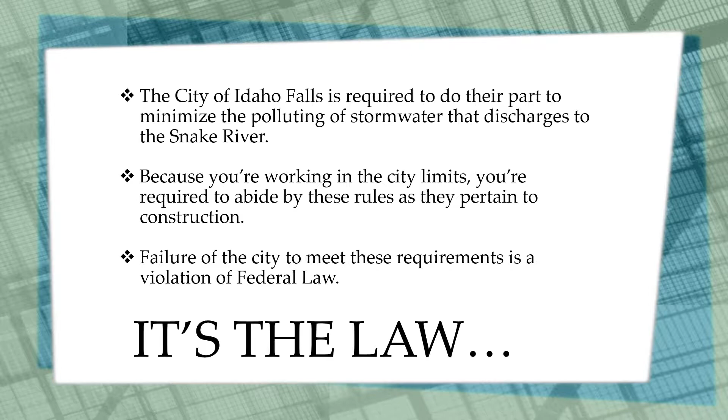Our goals and objectives for today are for you to understand what we can do to minimize the impacts of construction on water quality, understand the requirements of the City of Idaho Falls, the State of Idaho, and the EPA, and to learn about BMPs, or Best Management Practices for Construction, your tools for doing your part.

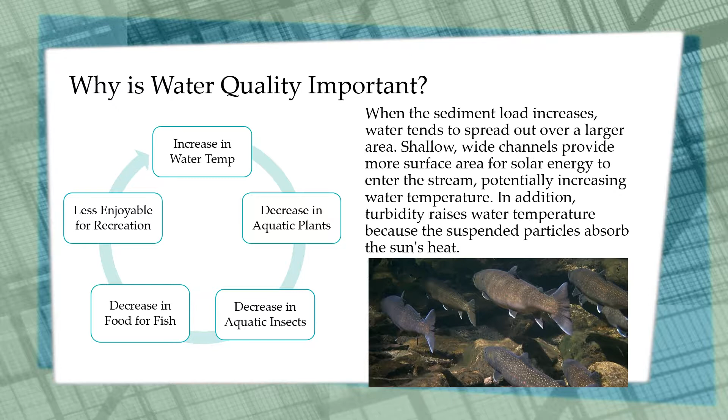So why is water quality important? When sediment load increases in a river, the water temperature increases. As that water temperature increases, aquatic plants die, aquatic insects decrease, leaving less food for fish. High temperatures also mean that certain species of fish can no longer thrive or survive. It also makes recreation less enjoyable. There are countless uses for clean water. It's important that we do our part to try and keep our lakes and rivers clean.

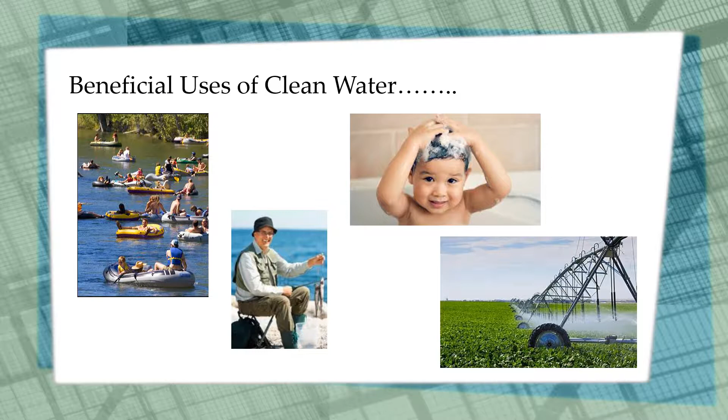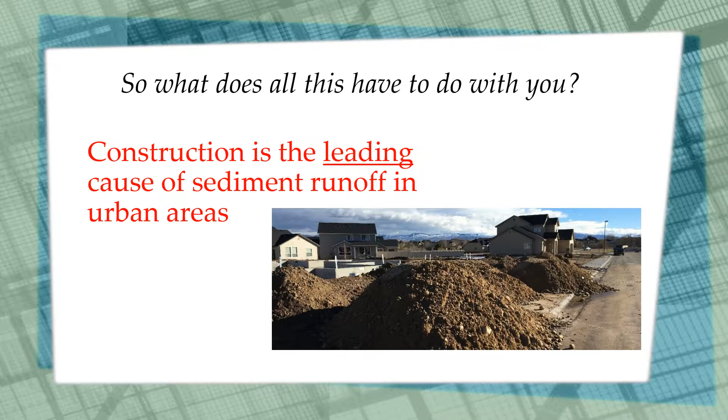So what does this have to do with you? Construction is the leading cause of sediment runoff in urban areas. Under the EPA's Clean Water Act is the National Pollution Discharge Elimination System. The NPDES is over stormwater management for 3 different sectors: construction, industrial, and municipal. The municipal separate storm sewer system is a sector that applies to the City of Idaho Falls because the city discharges stormwater to the Snake River.

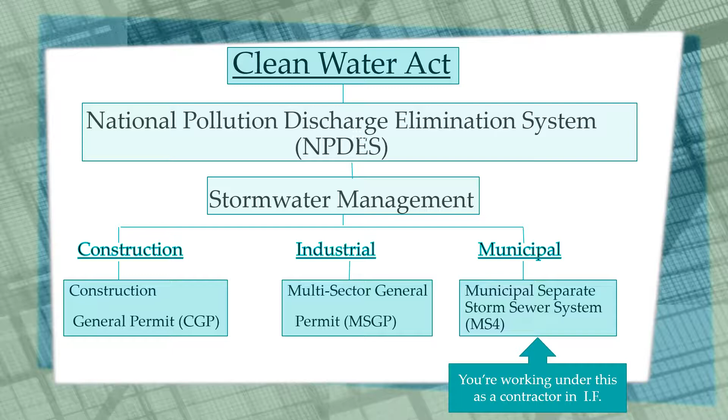When you're working within the City of Idaho Falls, you're required to comply with the city's Erosion and Sediment Control Ordinance. The purpose of this ordinance is to protect stormwater, groundwater, water bodies, water courses, and wetlands from construction activities pursuant to and consistent with the United States Clean Water Act. Their goal is to manage and control the amount of pollutants in stormwater discharges, soil erosion, sediment discharges, mud and dirt deposits on public roads caused by or the result of construction activities.

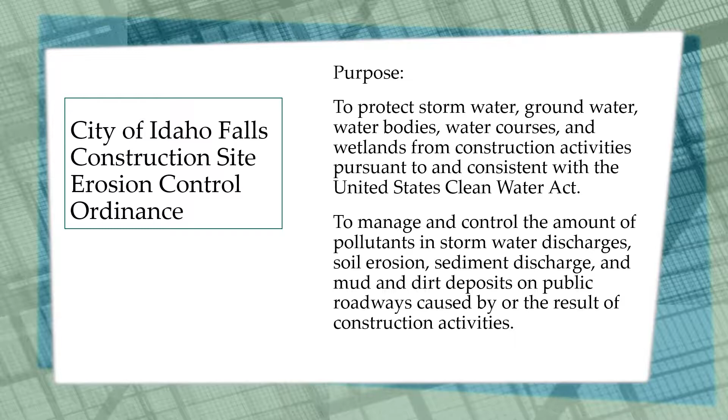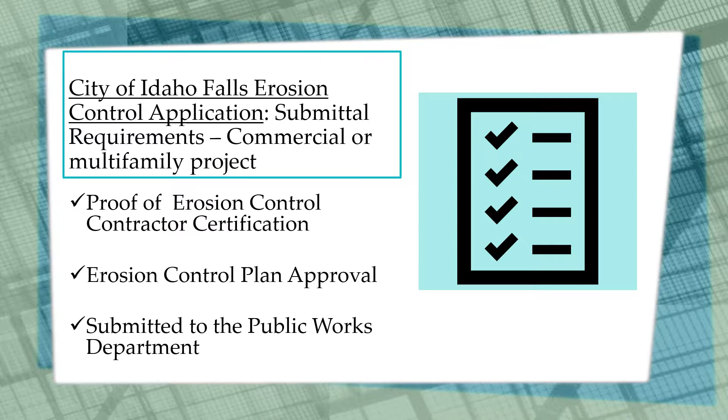The City of Idaho Falls erosion control application must be submitted to the Department of Public Works for commercial or multifamily projects. This application must include proof of an erosion sediment control contractor certification, and you must obtain approval of your erosion control plan. For single-family residential projects, your erosion control application must be submitted to the building department. Your project's erosion and sediment control BMPs will be inspected during the foundation inspection.

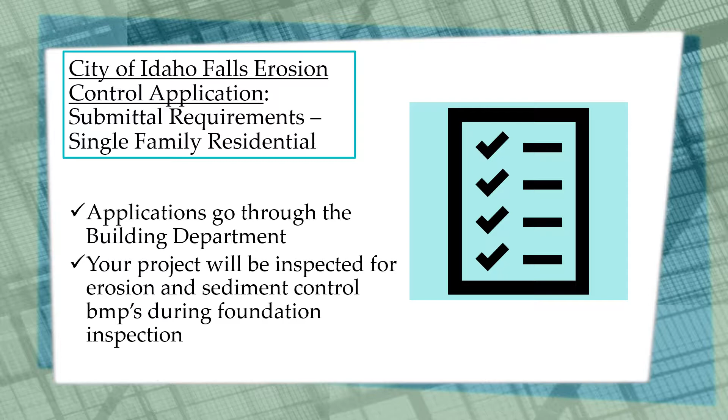The City of Idaho Falls requirements are that no clearing shall commence until all erosion and sediment control BMPs have been installed. Notify the building department or the Public Works Department at least 2 working days before the start of construction, at the installation of your BMPs, completion of final grading, and close of construction or final landscaping.

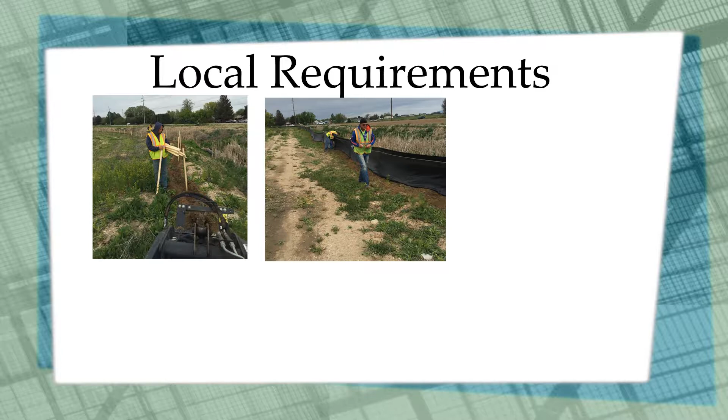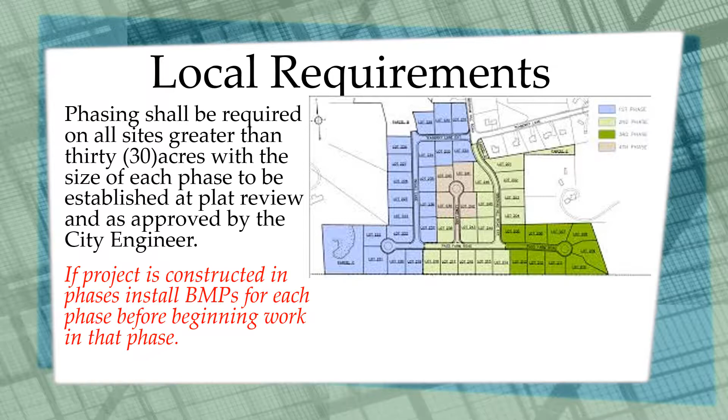The city requires that all sites greater than 30 acres be constructed in phases. Those phases are established at the plat review period and are approved by the city engineer. If a project is constructed in phases, you must install your BMPs for each phase prior to beginning work on that phase.

All erosion and sediment control BMPs shall meet the design criteria as set forth in the BMP manual for Idaho cities and counties that was published by the Idaho Department of Environmental Quality. You can go to your nearest Idaho Department of Environmental Quality office to obtain a hard copy of this manual, or you can go to their website to download a digital copy. In addition to using this manual, always refer to the manufacturer's installation instructions for the specific products that you purchase to use.

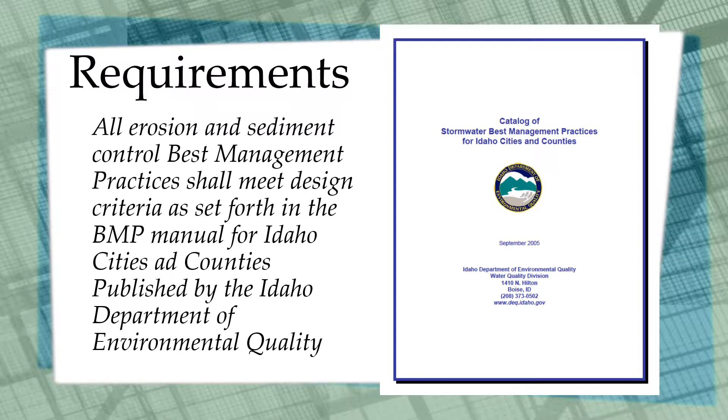The Idaho Department of Environmental Quality has jurisdiction over air quality for the entire state of Idaho. Fugitive dust from construction is considered air pollution and is therefore regulated by the Department of Environmental Quality. There are consequences for non-compliance. Failure to reasonably control fugitive dust on your job site may result in enforcement action by the Idaho Department of Environmental Quality. Enforcement action can include monetary penalties.

The Idaho Department of Environmental Quality has oversight over air quality for the entire state of Idaho. Fugitive dust from construction is considered air pollution and is regulated by the Department of Environmental Quality. Failure to reasonably control fugitive dust may result in enforcement action by the Department of Environmental Quality. This enforcement can include monetary fines.

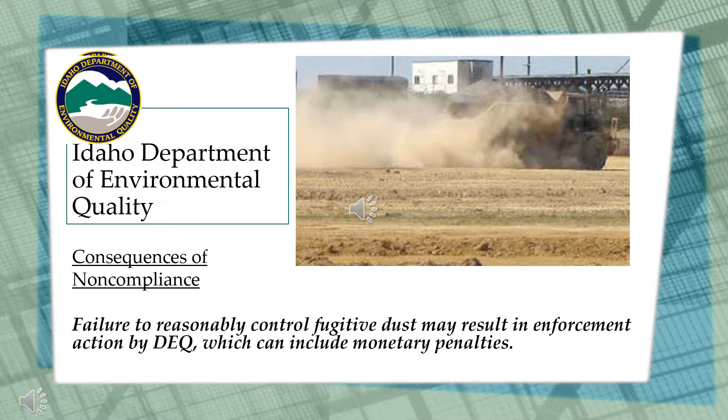As we mentioned before, the EPA's Clean Water Act includes coverage over stormwater from construction activities through the Construction General Permit. The EPA's coverage through the Construction General Permit is for any construction project that disturbs 1 acre or more. It also applies to smaller projects that are part of a larger common plan of development. An example of a larger common plan of development would be a subdivision.

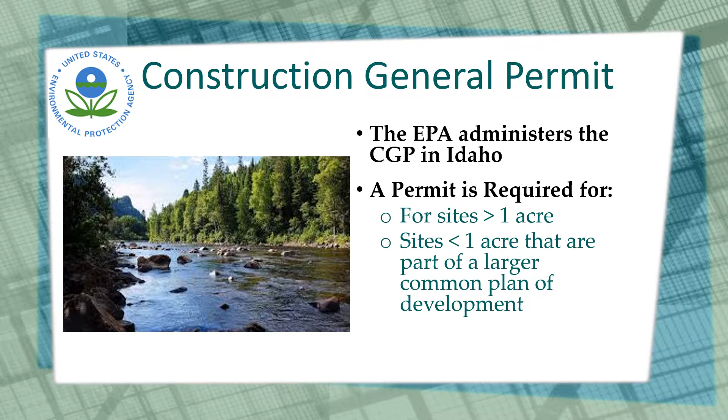If your project falls under the requirements of the Construction General Permit, a Stormwater Pollution Prevention Plan, or SWPPP, is required. A SWPPP should be provided to you if it's needed. If it's not and you know it's needed, don't start work until one is prepared by a qualified plan designer. The SWPPP must be submitted to the EPA via a Notice of Intent 14 days prior to construction. The SWPPP document must be kept on site at all times. This is applicable inside and outside the city limits.

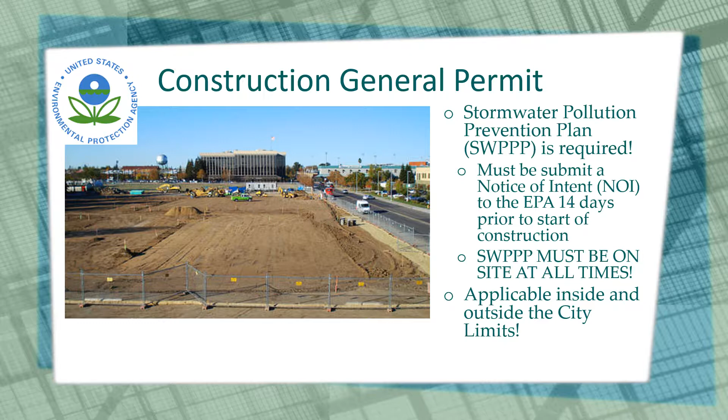Your stormwater pollution prevention plan will include a very detailed written document. It will also have site maps, drawings, and inspection forms. Self-inspection is required once every 7 days or every 14 days and after a 1/4 inch rain event. You must keep your completed self-inspection forms on site at all times in the event that the EPA decides to visit your site. These forms are legal documents and are very, very important and must be kept on site for the duration of your project.

During your self-inspections, you'll be evaluating your BMPs to see if they need maintenance, replacement, and whether or not they need to be changed out. Maintenance consists of cleaning and minor repairs to BMPs. Replacement is necessary if a BMP has been damaged beyond repair or if it wasn't ever installed properly. If you see that a BMP is insufficient to perform as anticipated, additional BMPs may need to be added or the BMP be replaced entirely with a different one.

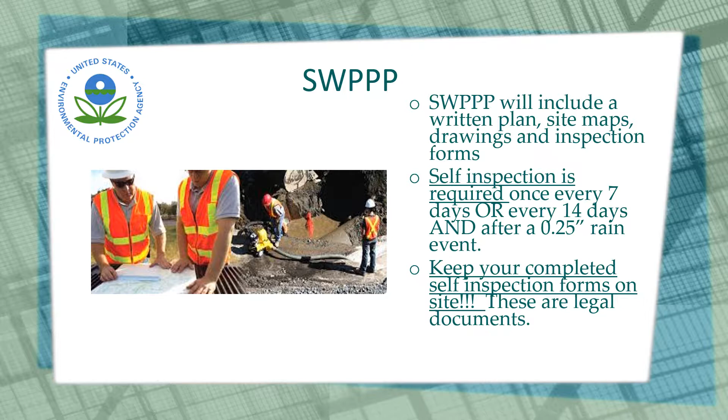Your stormwater pollution prevention plan requirements will be very specific as far as stabilization. All bare soil areas must be covered either with hard surfaces, landscaping, or native vegetation. Examples of hard surfaces include buildings, concrete, and asphalt. Perennial vegetation, such as grasses, must be reestablished to at least 70% of the normal local vegetative cover. There cannot be any large bare areas remaining. You must continue to do inspection until you achieve final stabilization.

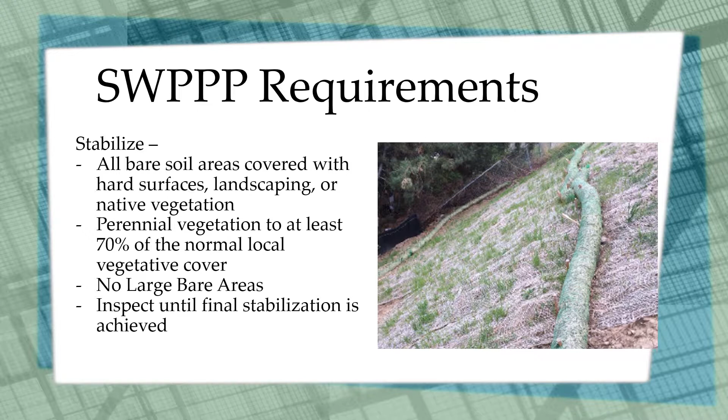If your project requires dewatering and you're dewatering to surface water, the EPA requires turbidity monitoring to be done. Turbidity is a measure of the level of sediment that's in the water. You'll need to take a turbidity reading of the receiving water directly upstream of the project, as well as right where you're discharging into that receiving water, and compare the two readings. The water discharging from your site must be within 50 NTUs of the receiving water's turbidity measurement. These measurements must be recorded and kept on site for the EPA to inspect. If you don't feel like you or your staff are qualified to complete the turbidity monitoring, there are testing companies for hire that can do this for you.

At the end of your project, you must terminate coverage under the Construction General Permit. In order to do that, you need to remove all equipment and potential pollutants from your site. You need to remove all BMPs not intended to be permanent or intended to decompose in place. You need to achieve final stabilization of your site. And finally, you must get online and file a Notice of Termination, or NOT, at the EPA's website.

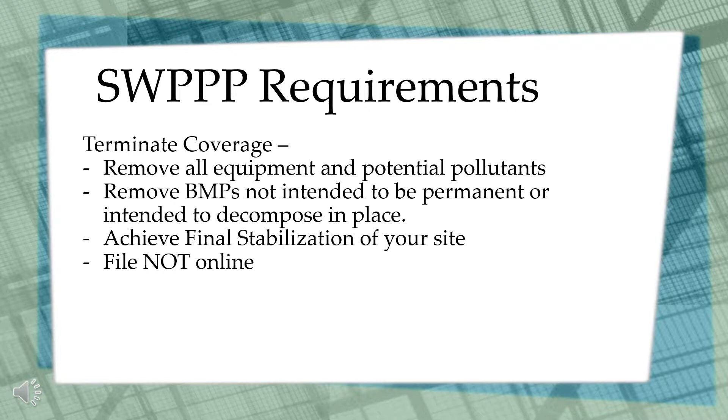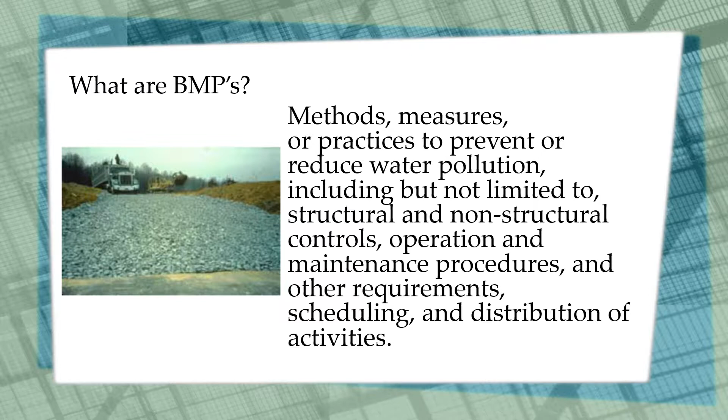Okay, we've completed talking about the federal, state, and local requirements. Now we're going to talk about the best management practices that you're going to need to incorporate on your project. So just what are BMPs, or best management practices? BMPs are the methods, measures, or practices used to prevent or reduce water pollution, including but not limited to structural and non-structural controls, operation and maintenance procedures, other requirements, scheduling, and the distribution of your construction activities. The different classes of BMPs include erosion control, sediment control, run-on and runoff control, housekeeping and materials management, planning and project management, and post-construction BMPs.

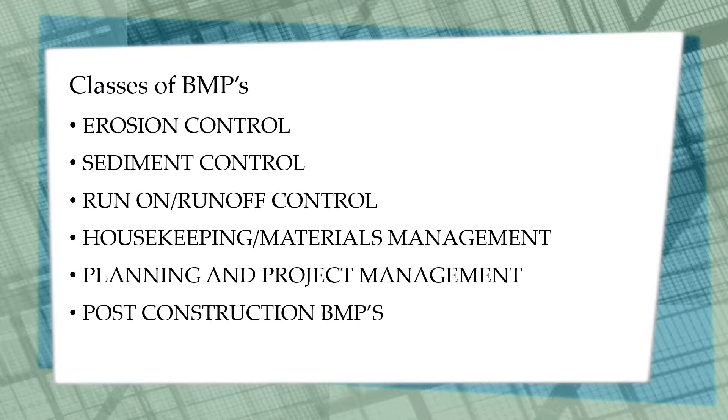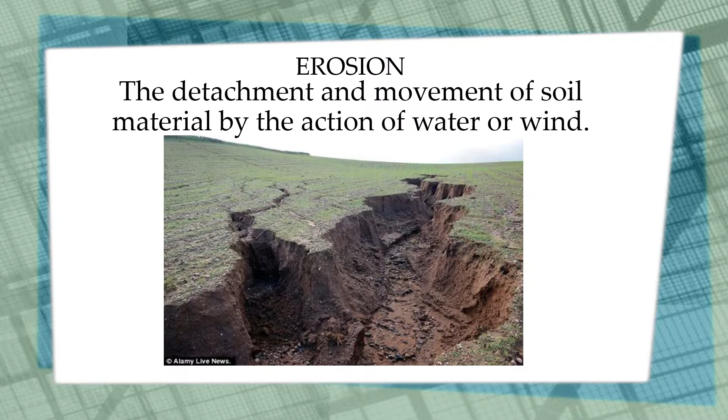So before we talk about them, let's talk about why we need BMPs. We need BMPs because of erosion. Erosion is the detachment and movement of soil material by the action of water or wind. We have BMPs because we have erosion. Erosion leads to sediment that gets into our stormwater, that gets into our surface waters. So our goal on construction sites is to stop erosion from happening in the first place.

The types of erosions that we deal with include splash erosion, which comes from raindrops, sheet erosion, rill erosion, which leads to gully erosion, and then channel erosion. If we can keep erosion from happening in the first place, then we'll spend a lot less time cleaning up sediment around and near our job site for the duration of the project.

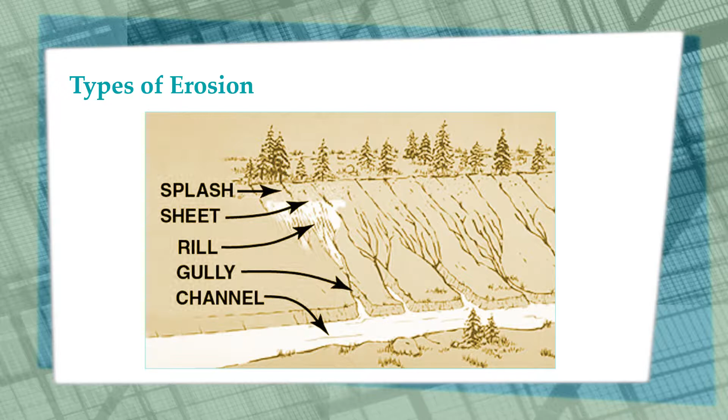Erosion control is our first line of defense. If we can keep soil from moving in the first place, then we don't have to clean it up someplace else. Our goal is to prevent water from running across our exposed slopes and surfaces as much as possible, and to try and keep soil in place. If we don't have erosion, then we don't have to clean up sediment someplace else. This is a case of an ounce of prevention being worth a pound of cure.

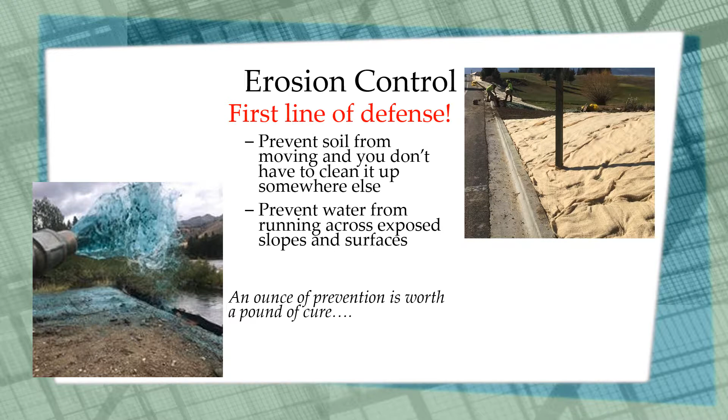So what factors influence erosion? Soil erodibility is a huge one. Silts and fine sands are very erodible, and we have a lot of them in Idaho, whereas clays and heavy gravels are not as erodible. Vegetative cover is another big one. Good vegetative cover provides protection from erosion through roots holding the soil in place, as well as the plants themselves protecting the soil from raindrop erosion. Plants also slow down the velocity of water as it flows over the ground. Reducing the velocity limits how much power the water has to pick up soil particles.

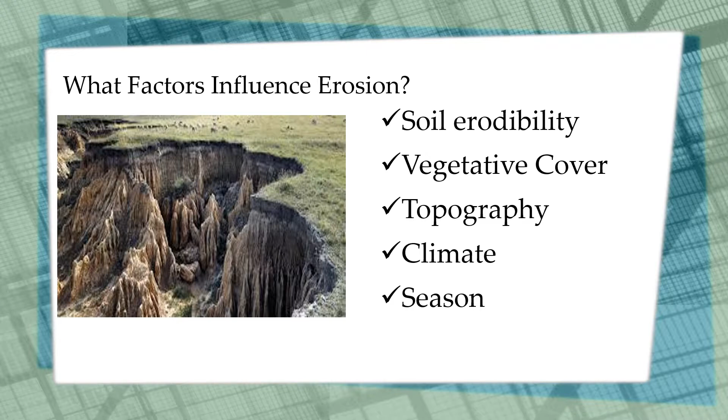Topography is an obvious one. The flatter, the shorter the slope is, the less likely it is to see significant erosion, where longer, steeper ones are much more vulnerable. Climate determines how much precipitation a project site will see. Areas with high annual rainfall are much more susceptible to erosion than arid regions. And finally, season. Regardless of where your project is, constructing it during winter months will definitely impact how much erosion you will need to account for during your project.

Now we're going to cover the erosion controls that you might use on your project. The first one will be preserving vegetation. We'll go over slope tracking and slope roughening. We'll talk about mats and blankets and mulching.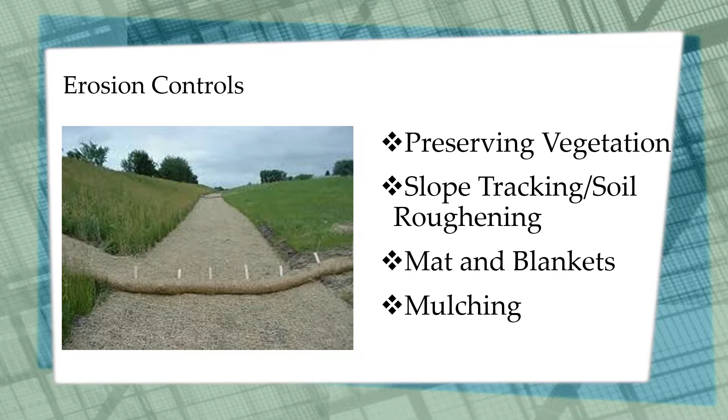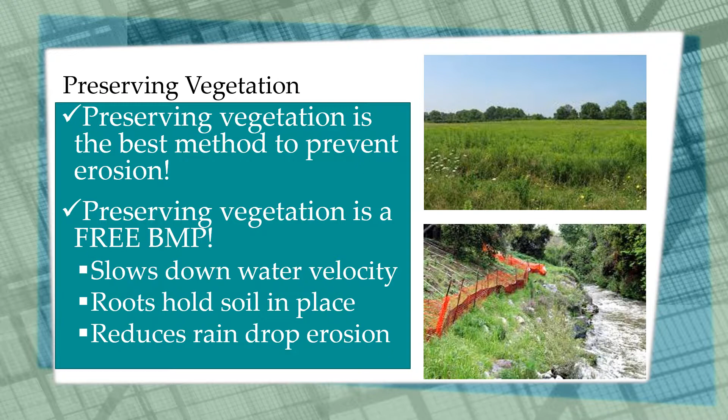The number one thing that you can do to minimize erosion on your project is to preserve vegetation. Preserving vegetation is a free BMP. It slows down the velocity of the water, the roots help hold soil in place, and it also helps reduce raindrop erosion. Best thing you can do is limit your exposed soils by preserving existing vegetation. Use construction fence to provide protection for areas where you want to preserve existing vegetation. This will go a long way in reducing the amount of sediment runoff from your site.

The EPA's construction general permit requires a 50-foot separation between any surface waters such as lakes, rivers, or wetlands, and any ground disturbing activity from construction. Use construction fence to maintain that 50-foot buffer between your project and any surface water.

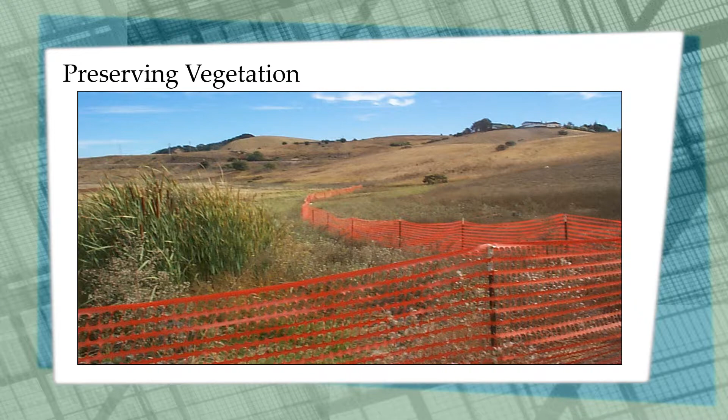Next is slope tracking or soil roughening. The purpose of this is to hold the soil in place by firming it down. It also helps trap the seeds in the little grooves that are created from the tracks. Also, the roughening from the tracks reduces the flow velocity of the water as it runs over it. Some of the maintenance issues to consider are making sure that you do your slope roughening when you know that there isn't rain in the forecast. Additionally, it's really critical that the soil roughening or the tracking be done up and down the slope and not parallel to the slope.

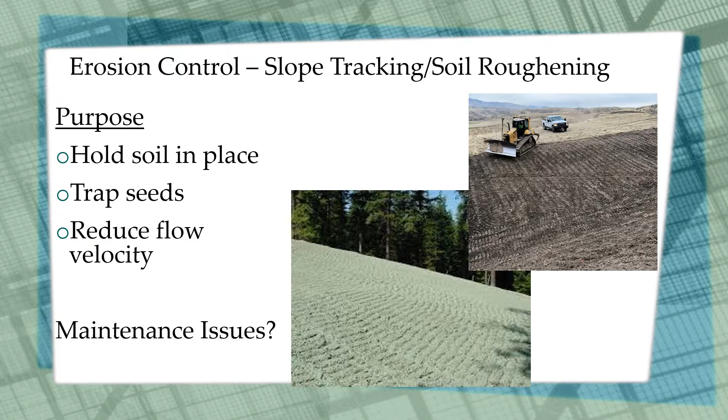Mats and blankets are another erosion control BMP. The purpose of the mats and blankets is to do temporary stabilization of your slopes. They help to establish vegetation by protecting the seeds as they germinate. They also come in a variety of types, thicknesses, and specifications. Some erosion control mats and blankets are meant to last for 12 months, while others are intended to last up to 3 years. So make sure you get the blanket that's appropriate for your intended use.

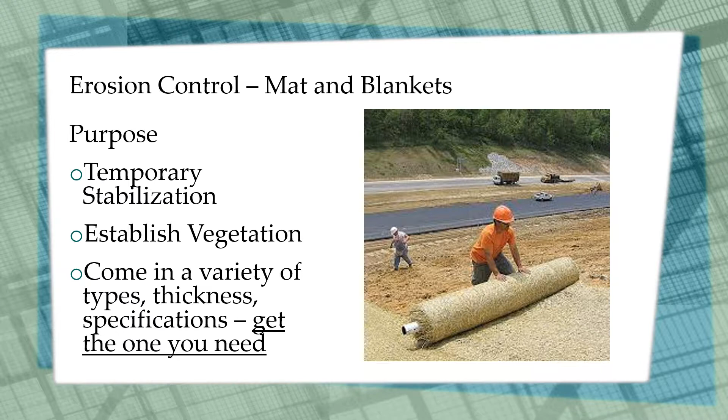The key to mats and blankets being effective is proper installation. Seed beds need to be prepared prior to the mats being installed. The mats must be installed from the top down the slope. The mats need to be staked in well all along the slope, and the mats need to be overlapped sufficiently so that there aren't gaps between them. And the most critical is that the mats need to have really good contact with the soil. So the slopes need to be graded prior to the mats being placed. If there are holes or large lumps in the slopes, then wherever those are is where soil erosion will take place.

One nice feature about mats and blankets is that they generally are intended to be left in place. As grasses become established, the mats and blankets will decompose and no longer be visible.

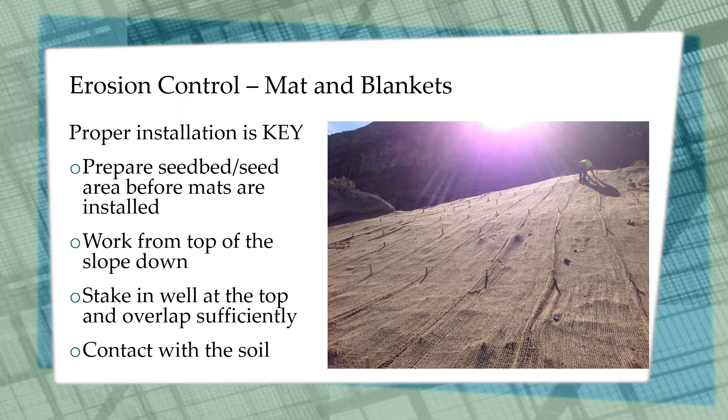Mulching is another highly effective erosion control BMP. Prepare the seed bed prior to applying the mulch. Make sure that you apply the mulch in more than one direction so that there aren't thin spots or shadowy spots. Also, make sure you check the forecast and don't apply within 24 hours of a rain event.

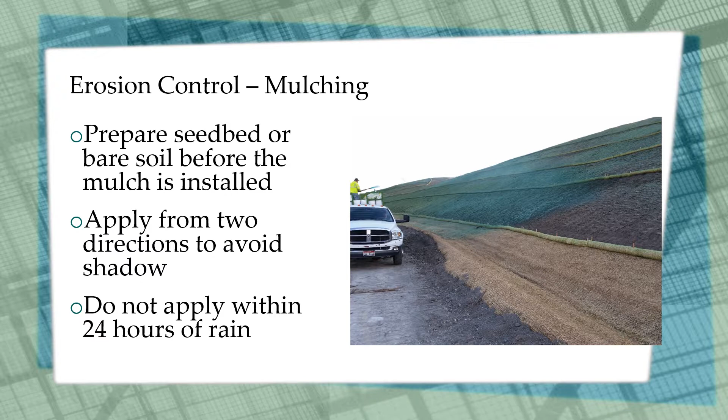Mulching is generally effective for slopes that are steeper than 3:1. It's really important that you apply the appropriate amount of mulch and tackifier. More mulch might be required on steeper slopes, while flatter slopes may not need as much mulch.

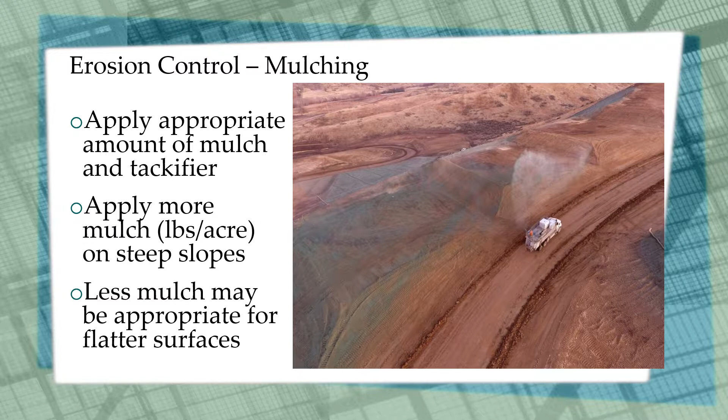Mulching can be initiated immediately after final stabilization or final grading of your surface areas. Make sure that you complete your stabilization of your bare areas within 14 calendar days per the EPA's Construction General Permit. Also, make sure you inspect and maintain those mulched areas, those stabilized areas, until they have completely been stabilized.

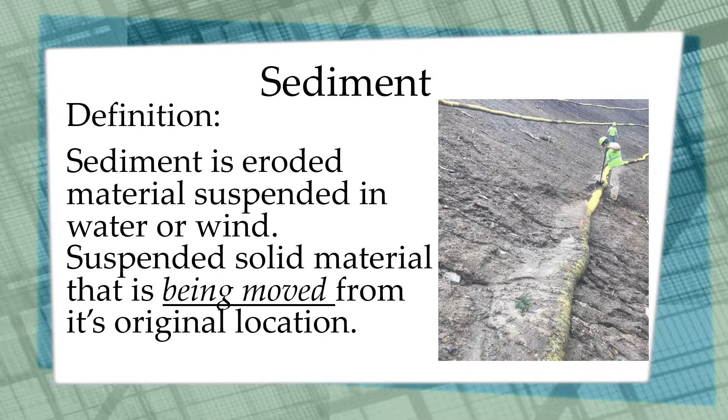That's the end of our erosion control BMPs. Now we're going to move on to sediment control BMPs. But first, the definition of sediment. Sediment is eroded material suspended in wind or water. It's suspended material that is being moved from its original location. Make sure you understand the difference between erosion and sediment, as there will be a test question about this at the end.

Sediment control BMPs include stabilizing your construction entrance, fiber rolls and straw wattles, silt fence, check dams, and inlet and outlet protection. Relative to erosion control BMPs, sediment control BMPs are generally about 50% effective. Erosion control BMPs are more likely to be 90% effective. Therefore, erosion control BMPs should be your first line of defense.

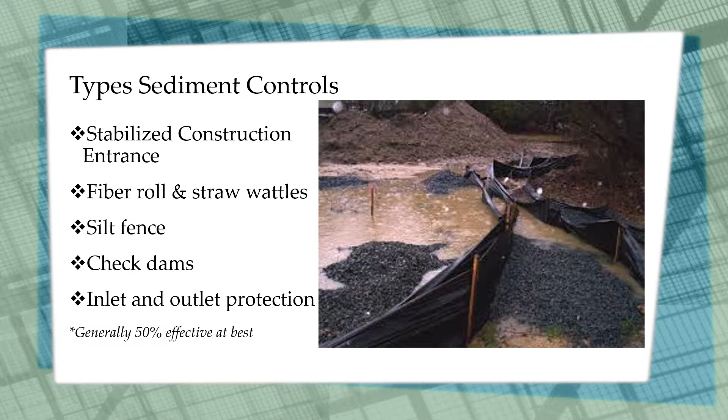A stabilized construction entrance is a non-negotiable. You must have this on all of your projects. A good construction entrance is way less expensive than sweeping track out every single day. Your stabilized entrance needs to consist of 2 to 4 inch clean crushed rock. The depth of it needs to be approximately 6 inches.

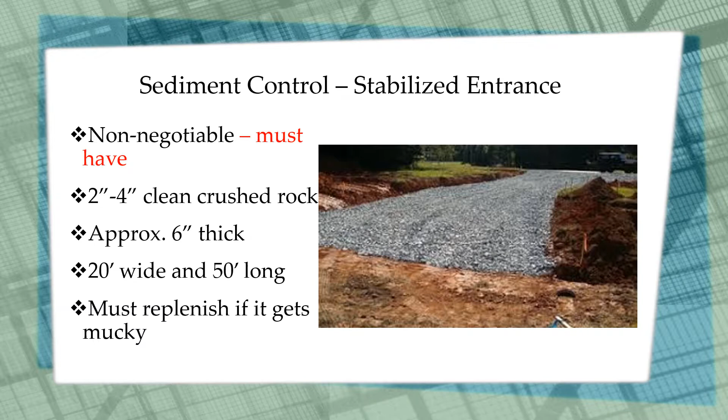The width needs to be 20 feet and the length into your project needs to be 50 feet, allowing for multiple tire rotations on the gravel to remove the dirt. At times you may need to replenish the gravel for that construction entrance as it will get clogged up depending on how much moisture you have in your soil type.

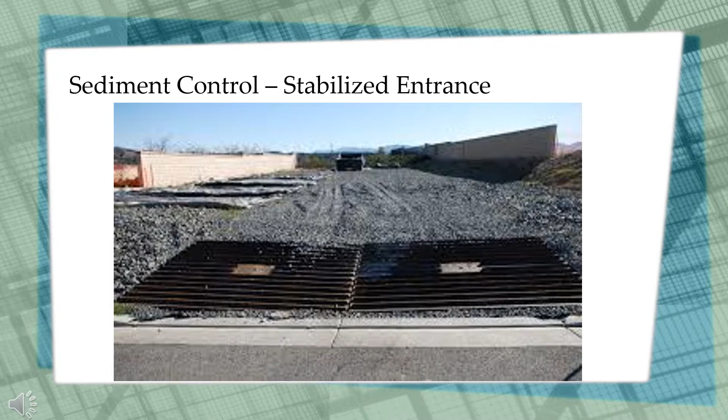Rumble strips are another tool you can use to help stabilize your construction entrance and reduce and eliminate soil and sediment from getting out onto your surface streets and into the storm drain. If you do have track out at your construction project, you must sweep and clean up that track out the same day that it happens.

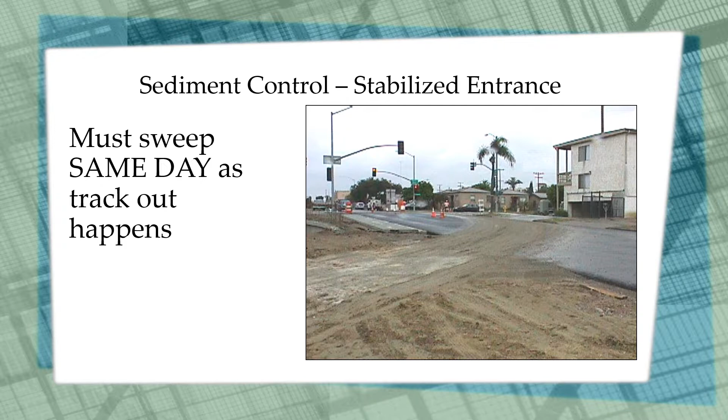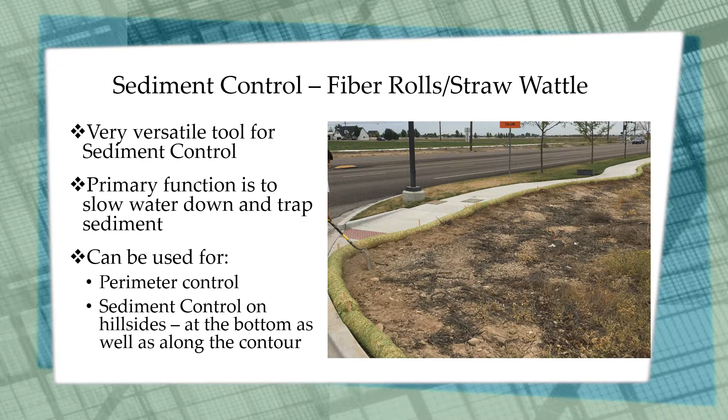Again, always make sure that you install fiber rolls along the contour. Make sure you overlap them sufficiently at the ends where they meet. Make sure you have very good contact with the soil for the entire length of the roll, and make sure that it's staked down properly, typically every 4 feet.

Maintenance issues associated with fiber rolls and straw wattles include the fact that they're not very durable. They will need to be replaced if they get broken. Additionally, you'll need to muck out any sediment buildup on the back side of them if there's a storm event. After a rain event, go and inspect your hillside that you installed your straw wattles on. If you see rills or gullies that have formed between your rows of straw wattle, immediately fill them. Otherwise, they'll just get worse over time.

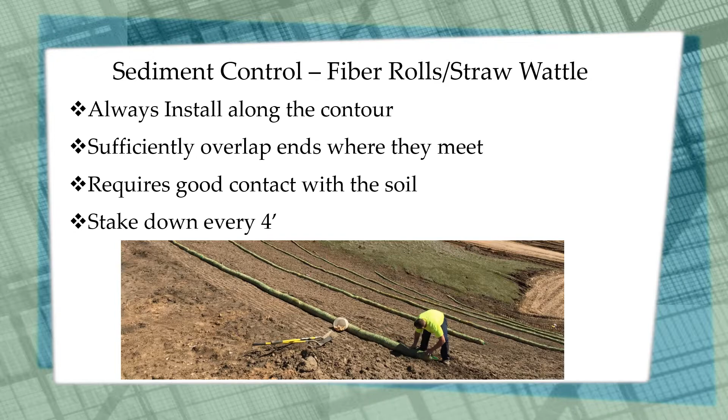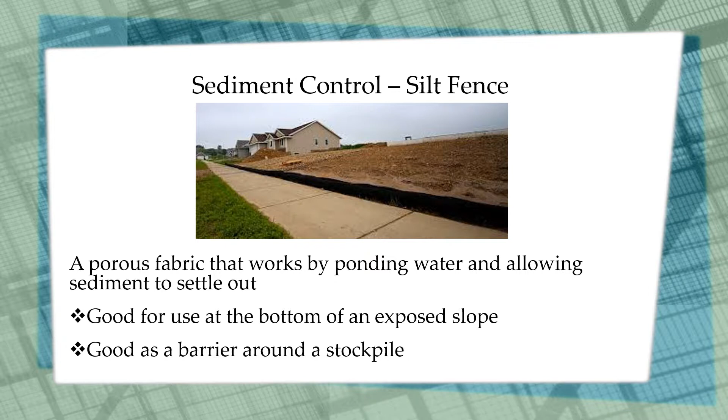Silt fence is probably one of the most common sediment control BMPs used. Silt fence works by ponding water and allowing sediment to settle out. Silt fence is good for use at the bottom of large exposed slopes, as well as a barrier around the bottom of stockpiles. Silt fence should never be used in high concentrated flows. It is intended to pond water.

Silt fence is absolutely useless if it's installed improperly. It must be trenched in as shown in this diagram to the right. The stakes have to be installed on the downhill side. Additionally, it must be maintained. As sediment builds up behind it, it must be cleaned out in order for it to continue to be effective.

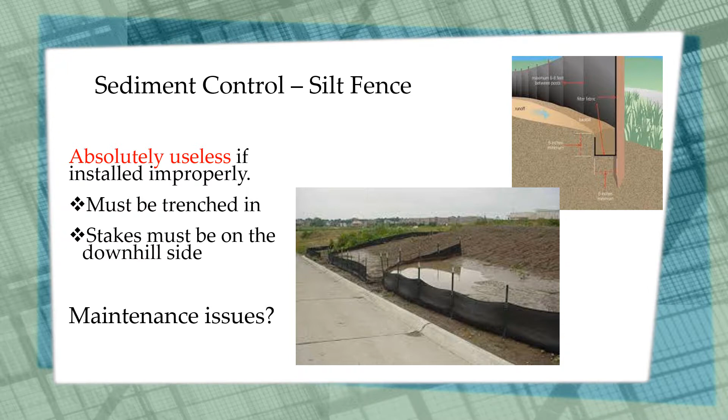Check dams are an excellent sediment control BMP to be used in ditches and swales. The primary purpose of check dams is to slow down the velocity of the water while ponding the sediment behind the check dams.

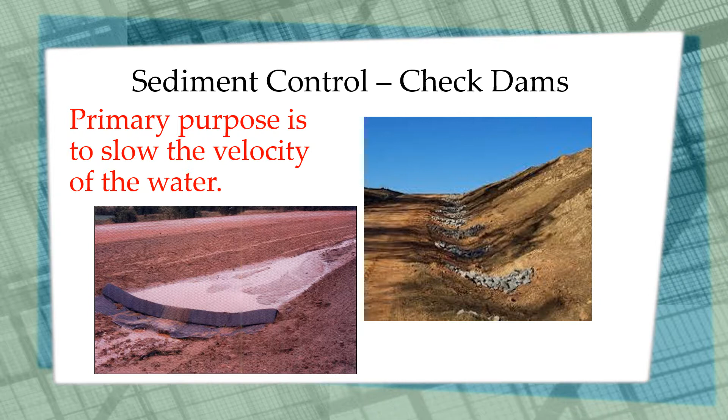The check dam on the bottom left is working really well, as evident by how much sediment is deposited upstream of the check dam. But it needs to be cleaned out. Like all BMPs, check dams work best when they're maintained properly.

Again, proper installation is key for the effectiveness of check dams. The elevation of the toe of the upstream check dam needs to match the elevation of the top of the downstream check dam. Also, the center of the check dam needs to be lower than the sides. Otherwise, water will quickly find a path along the sides and erode them.

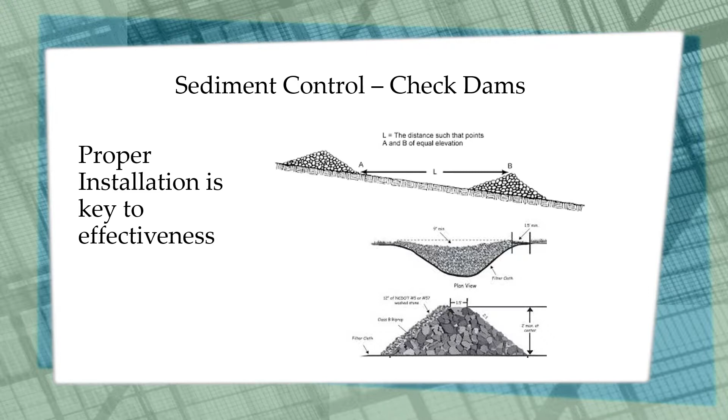Inlet protection devices are the last chance to stop sediment before it goes into the storm drain system and enters the Snake River. Again, the primary purpose of this BMP is to slow down the velocity of the water and settle out sediment. A variety of options are available for inlet protection, including coconut fiber mats, similar to the one shown in the right-hand corner, rock-filled bags, as shown on the bottom right, and inlet devices, as shown below.

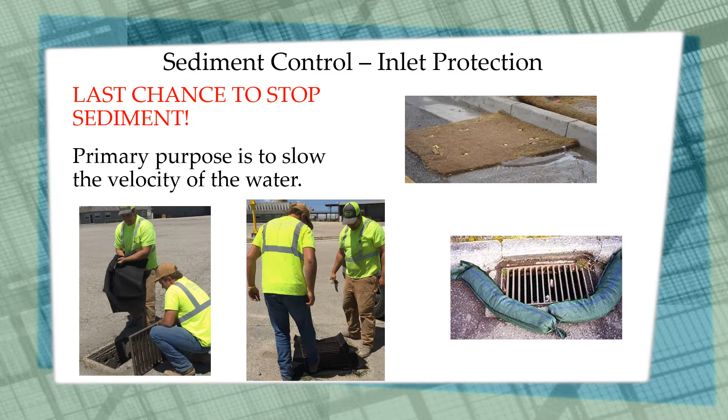Inlet protection devices must be maintained either by cleaning them regularly or replacing them regularly. Unmaintained inlet protection devices can get clogged up and cause major flooding issues around your site during storm events.

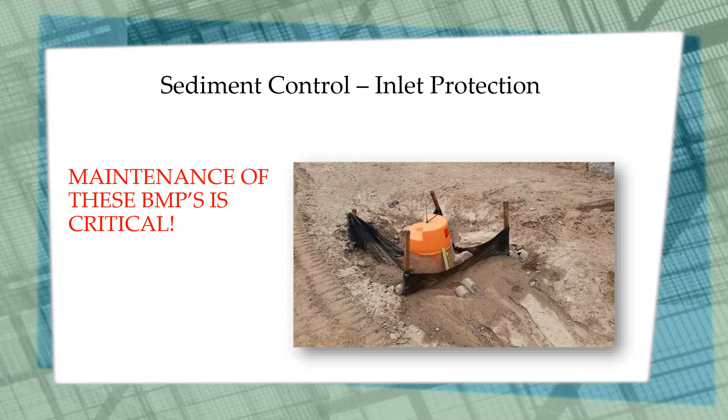Inlet and outlet protection is another important sediment control BMP. Again, the primary function, similar to other BMPs, is to slow down the velocity of the water and let the sediment settle out.

Use clean, angular rock for your riprap. Make sure that it's wide enough to collect all of the sediment that it needs to. The length will depend on the slope and the soil conditions.

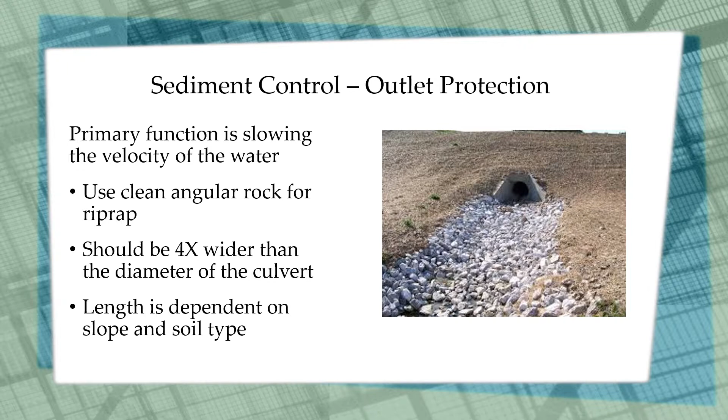The last sediment control BMP we're going to cover is run on and runoff control. Before your project starts, go out to the site and take a look and see what your surrounding conditions are. Do you need to put a berm around the upstream edge of it to divert water from running onto your site?

Conversely, look at where your site drains off and see whether or not you need to put some sort of berm or straw wattle or other form of BMP to keep runoff from leaving the site.

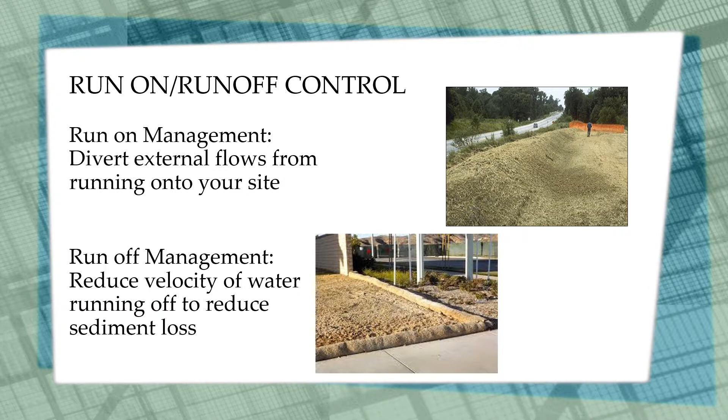Now we're going to move on to our next class of BMPs, which is housekeeping or materials management. This group includes debris containment, dust management, storage and proper disposal of toxic materials, and stockpile management.

Managing your debris is key to keeping a job site clean. Make sure you size your debris containers properly and have them emptied on a regular basis. Clean up the area around the containers frequently.

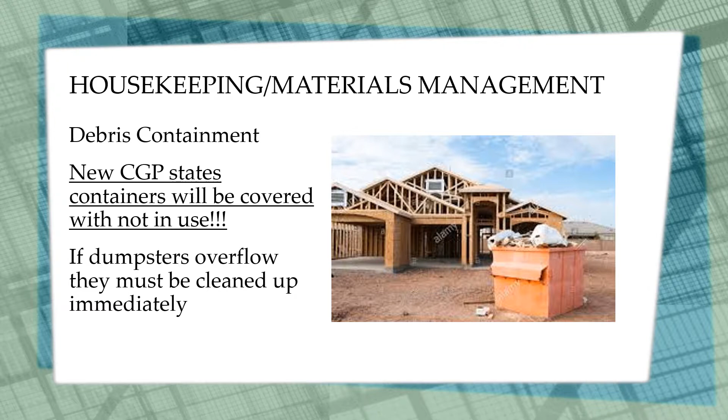The new construction general permit states that all containers will be covered when not in use. This may seem impractical, but it is the requirement. So do your best to have some way to cover your container when it's not in use.

Dust management is really critical for our job sites. Why is dust regulated? We have a lot of very fine silt particles in Idaho. Those silt particles are comprised of silica or glass. So the dust in our air is basically fine, tiny, sharp pieces of glass, which is extremely hazardous.

As those fine particles are inhaled, they penetrate deep into the lungs, causing lung diseases. They can affect people with impaired lungs as well. Not only is it a health risk, but it's also an air quality issue, and it's a nuisance.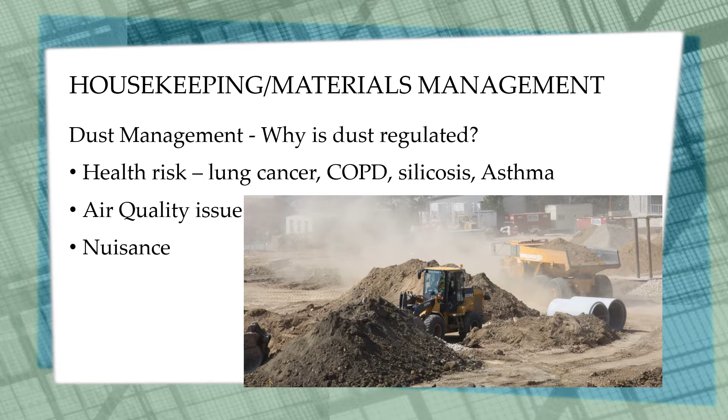Dust management BMPs include stabilizing your roads, watering your exposed areas, preserving existing vegetation, sweeping, managing your stockpile, and saw cutting using water and a vacuum.

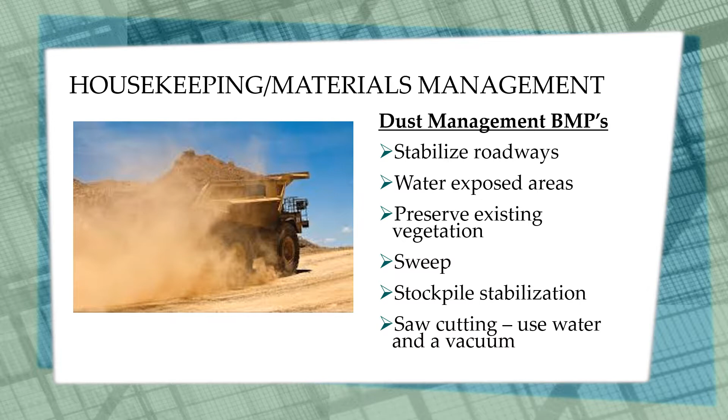Storage and proper disposal of toxic material is an important part of good housekeeping for your job site. Before your project starts, consider what sorts of toxic chemicals you might have on your project, including fertilizers, paints, oils, etc.

Make sure you have provisions for storing these things properly. You'll need to be in a watertight container and covered.

If for some reason you do need to do maintenance on a piece of equipment on a job site, use drip pans or lay down a sheet of Visqueen underneath that piece of equipment.

If you do have a spill, make sure you clean up all of that spill immediately. Having a spill prevention kit on site is part of what you're going to need to have if you have toxic chemicals on your site.

A spill prevention kit can be purchased at a local construction supply store, or you can purchase a bucket and a shovel and a big bag of cat litter, which is primarily made of clay and is a great absorbent for toxic chemicals.

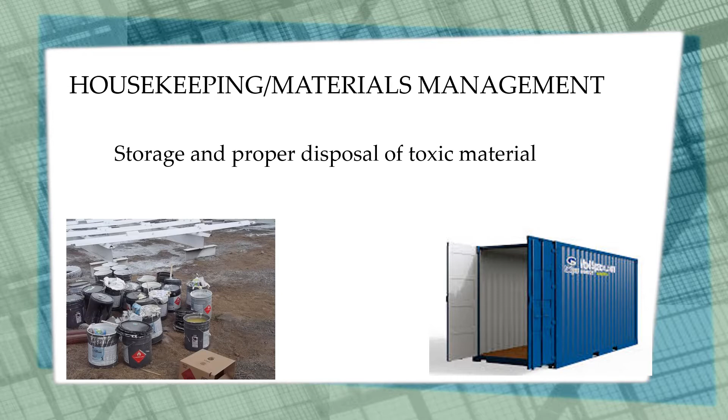A concrete washout is required by the Construction General Permit. Concrete washout is extremely toxic to aquatic life and cannot reach the storm drain inlets or waters of the US.

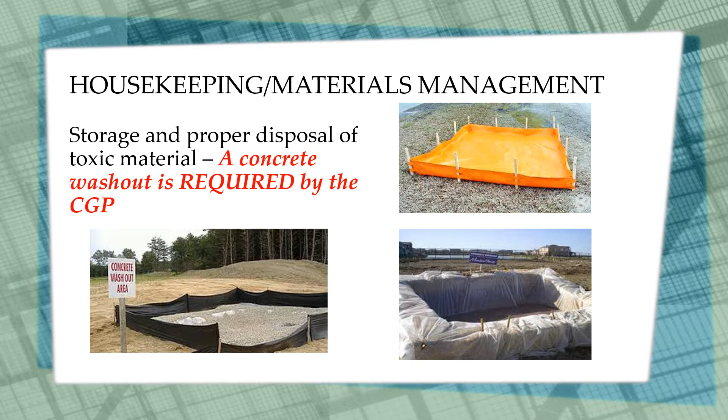Make sure you create that washout with a leak-proof liner. Properly size your concrete washout for the amount of concrete work that you expect to have on your job. And make sure that it's cleaned out on a regular basis and signed well so that the concrete contractor knows where it is.

Washout of any kind must be contained, whether it's from stucco, paint, mortar, caulk, drywall, whatever, and any spills must be cleaned up immediately.

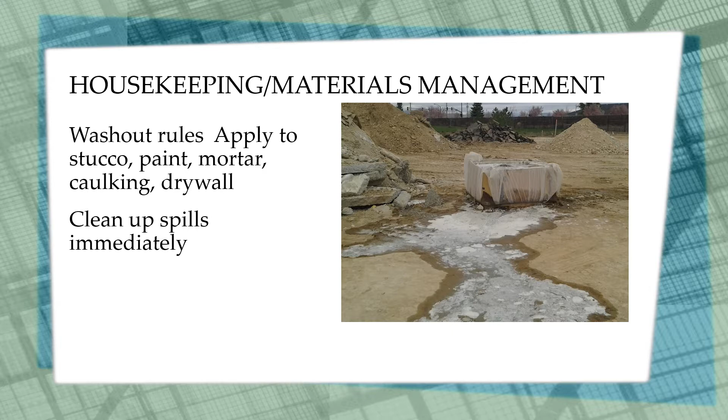Your job site porta potty should be staked down to protect it from vandals. Don't place it near a storm drain or a curb and gutter, or in a place where it could be tipped over easily. Again, keep a spill prevention kit on site and avoid vehicle fueling and maintenance if at all possible. And finally, sweep that construction entrance daily.

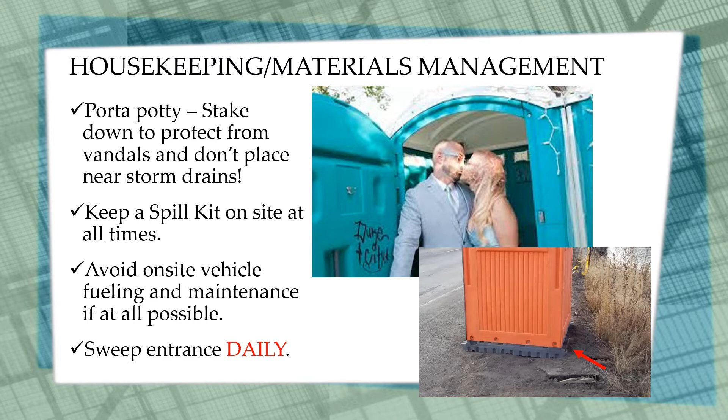And finally, stockpile management. If your stockpile is not going to be used for 14 days, it must be stabilized. It can be done through a variety of methods, ranging from covering it with Visqueen to seeding it or covering it with a tackifier, but it must be protected.

Also, consider where you're going to place that stockpile before you start construction to make sure that it's out of the pathway of any kind of stormwater runoff that could cause erosion and sediment.

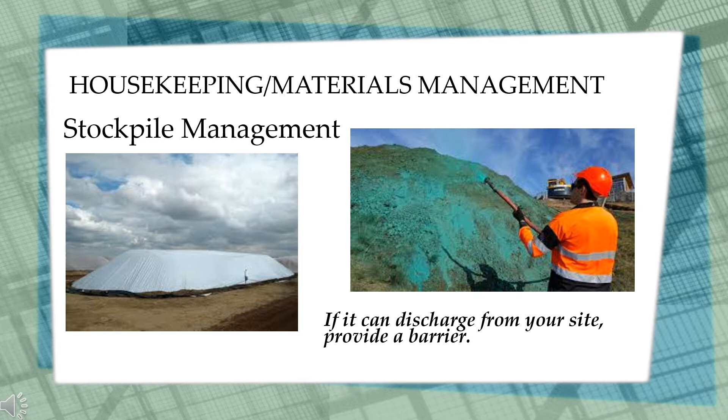Planning and phasing includes limiting exposed soil as well as proper scheduling of dewatering. When you're beginning to work your project, consider how you might phase the clearing and grubbing portion, trying to minimize the exposed soil at any one time.

Consider scheduling your excavation during dry months if at all possible, and make sure that it gets stabilized prior to the rainy season. If you do need to do dewatering, make sure you have an approved dewatering plan in your erosion and sediment control document, as well as your SWPPP document.

Plan this activity carefully. Try to do it when groundwater levels are their lowest to minimize the amount that you need to dewater.

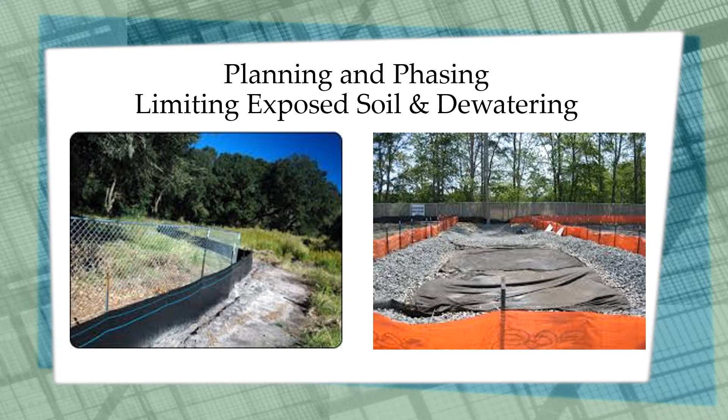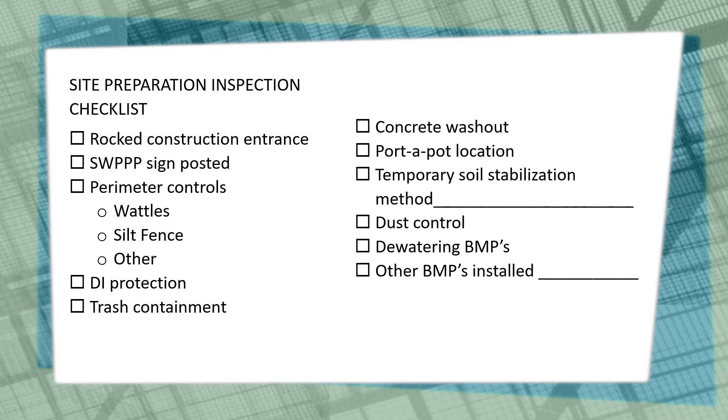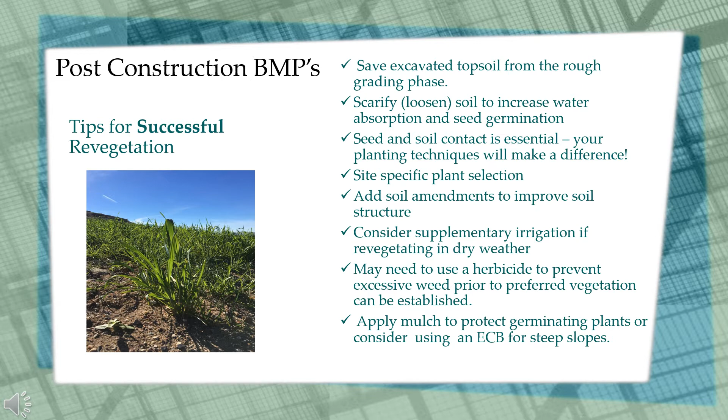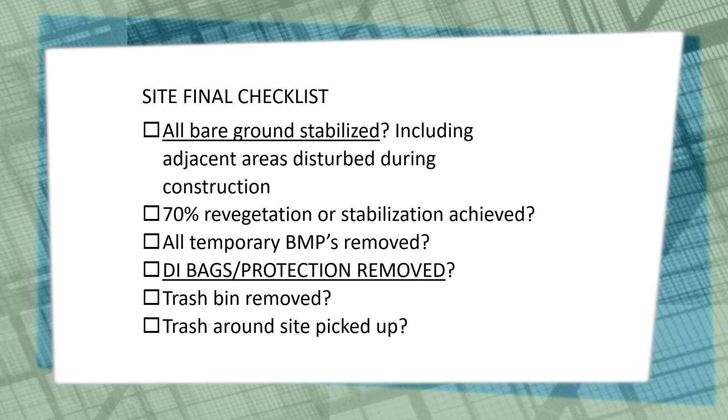Keep in mind that it's your responsibility to keep your BMPs maintained and in good working condition. It's also your responsibility to change BMPs if a particular one is proving to not be effective. Remember, keeping stormwater that leaves our construction sites as clean as possible before it reaches the waters of the U.S. is our responsibility.

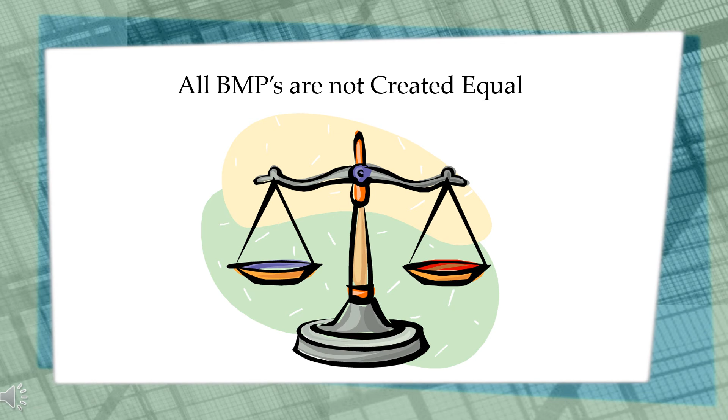Well, you've made it to the end. We've covered what we can do to minimize the impacts of construction on water quality. We've looked at the requirements of the City of Idaho Falls, the State of Idaho, as well as the EPA. And we've reviewed BMPs and their specific applications that you can use on your particular job site.